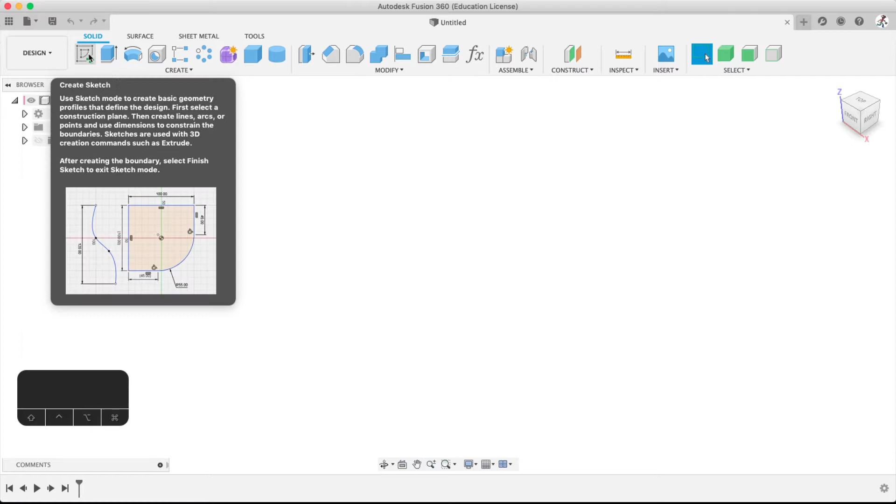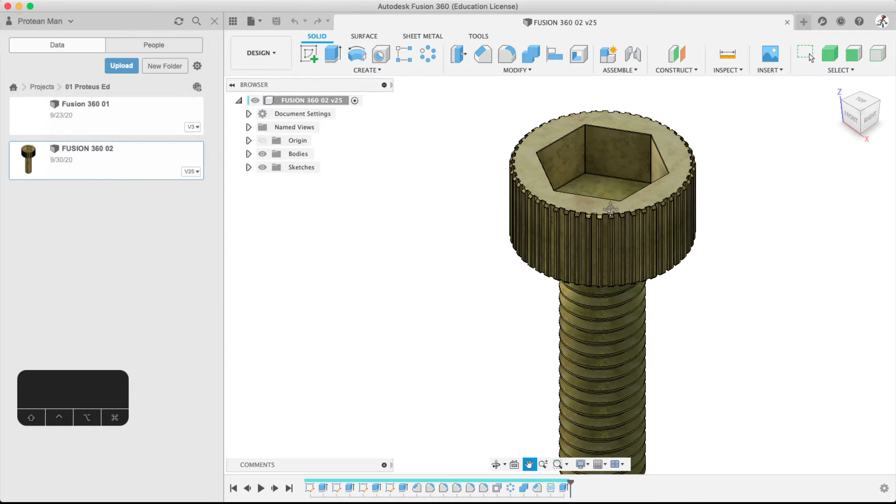Today we're going to look at sketching. We're going to look at some basics in sketching, and we are also going to redesign the beginning of this bolt, just the head part, in the sketching environment, because the head has those little ridges, those grips on it. This is an M3 bolt. So we're going to look at how to design this in a different way, more of an engineering professional CAD design way. And we're going to get right into that right now with a brand new design.

So first thing first is always save. I'm going to Command S and save it as Fusion 04 because it's the fourth video in our series. Now, what did I call it before? Fusion 360, yeah, 02. 03 was rendering, there wasn't a need for a different one for that. Now, let's get right into it. We're going to start with the head of our 3mm bolt.

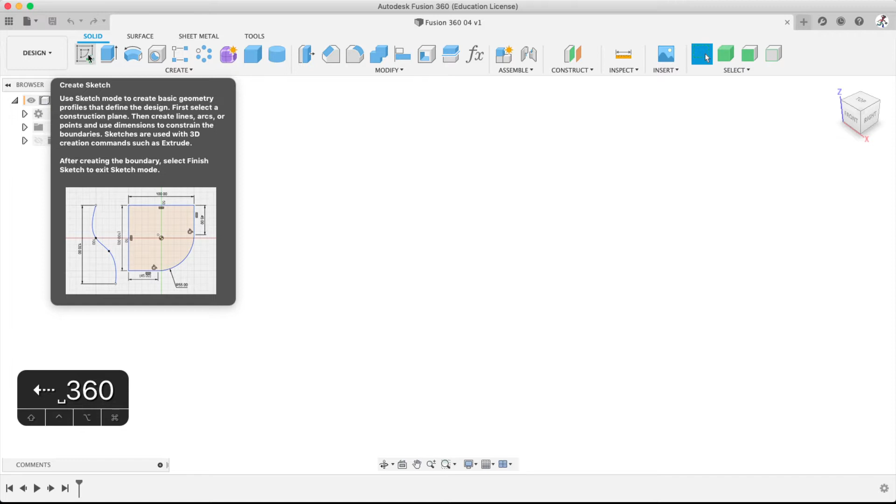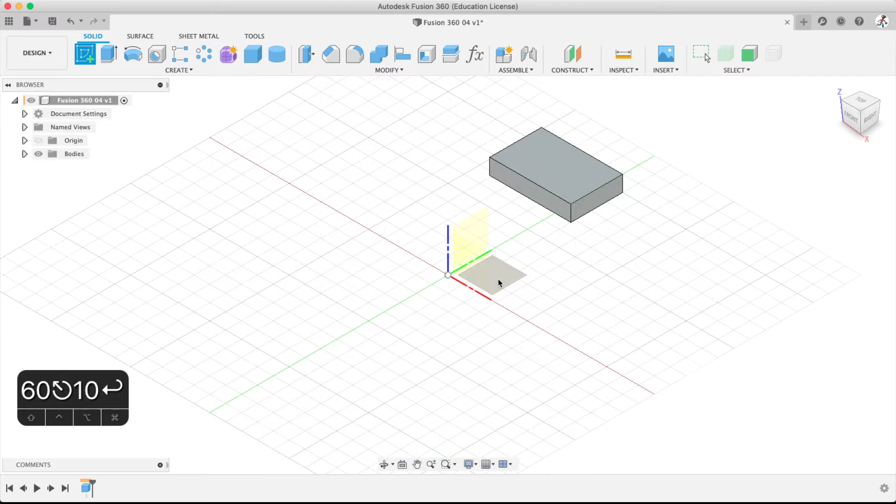Now, when you open the sketch environment, there's a few things that you should be aware of. One, when you click it, the origin will pop up. If you have other objects in the view, let's say I have a cube over here, that will also be there too. You can use any flat surface as the reference for your sketch. What that means is that I can use any of these origins, the X, Y, and Z planes, or I can use a part of this cube. If I want to design on this part of the cube, I can click that and it will go right to that, zoom in, and you can draw on there. That's the basics of the start in sketching.

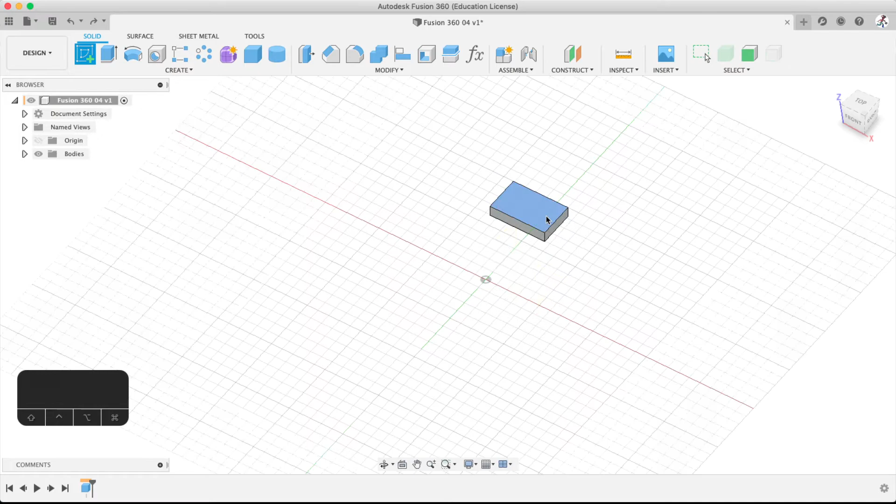It will also snap its view to whatever you select. You can see I did this. If I cancel out, go back to sketch, I click this, it will snap to the view. That's important to realize too. You can turn this off. I turn it off, to be honest, because I personally don't like how it snaps. Sometimes I have very complicated objects and the view gets cluttered when it snaps to a certain position. So I usually set it up so I can see it clearly, and then I sketch where I can currently see. That's just my workflow. You can do whatever you want.

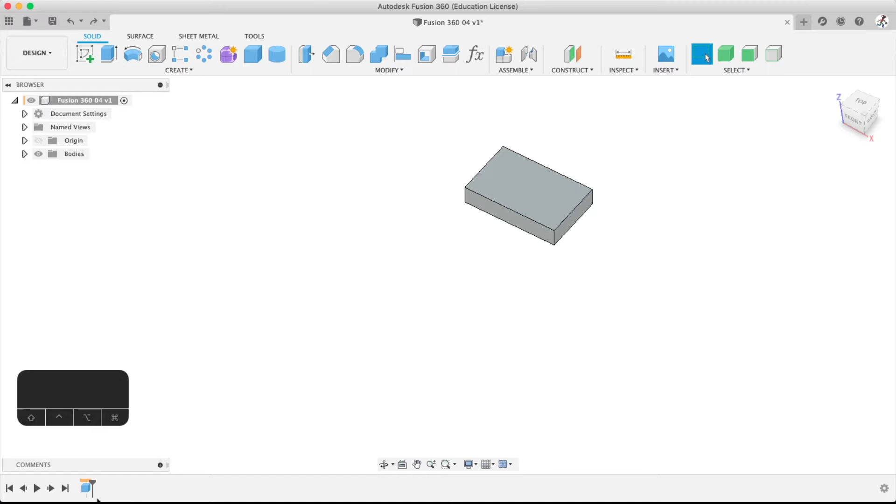But how you change it is up here on the right-hand side under your name or logo, whatever is in your Fusion software. In the preferences, I think it's under the Design tab. There's one of the options, it says Snap View to Sketching. Actually, I'll just go there right now. Preferences, because this is supposed to be for education design. I think it's auto look at sketch. It's right there. So I turn that off myself. I'm going to keep it on for just this video. And then I'm also going to remove this.

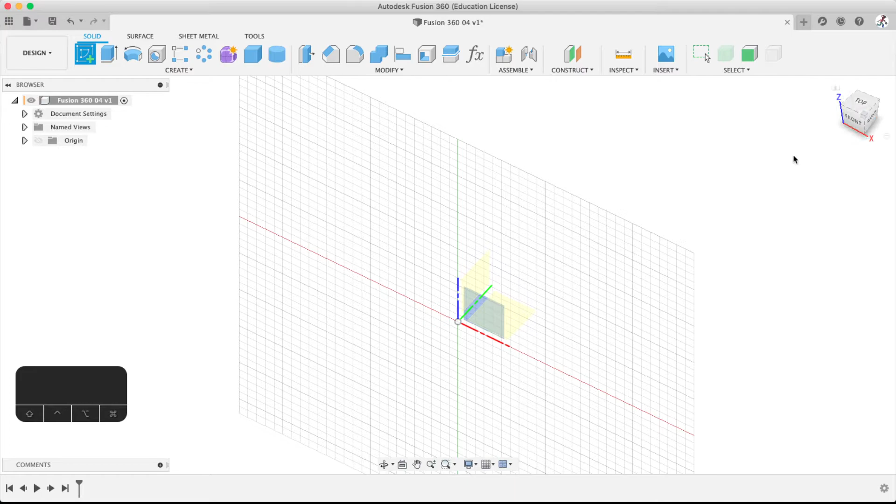This here is what my keyboard is doing. Shift, Command, etc. If you've seen previous videos, you know what I'm talking about. I'm not going to reiterate that again. So here we go. Sketching. I'm going to sketch on the Z plane. There's the top, and just by reference, that will tell me that is the Z plane. If you're brand new to Fusion and you have experience using, let's say, AutoCAD or other engineering or professional architecture drawing software programs, then this will be quite familiar to you, just different looks and different feels, but the tools and the way that it works should be very familiar.

If you are new to Fusion but also have no experience sketching at all, this will be a great way to start, because I'm going to show you some things that you might not realize right away, or little tidbit tricks that will help you avoid some frustrating things that, I promise you, I've gone through when I first learned Fusion that I now know, and it changed everything, because it was very, very hard to deal with certain things that weren't working the way I wanted them to.

Now, first things first, you can make your environment different. This is always a personal preference. Down here below, you have the movement and view options, which is the same as your middle mouse button, right? Moving around. But you also have things like your environment settings and mesh details and other different tabs you can mess around with. The environment settings is quite common for the first little bit of using your sketching.

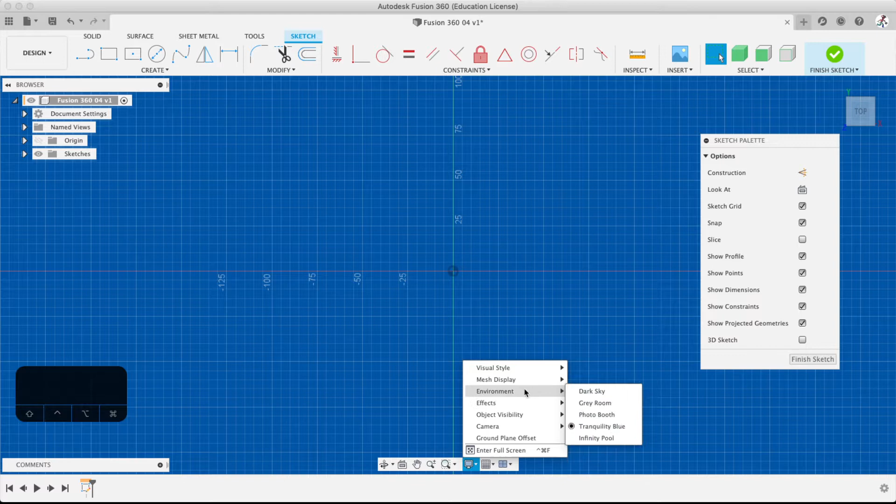Let's say you're an architect or you are an engineer, you might want to go to blue. This is a personal preference thing. The default, I think, is the tranquility blue. You can go photo booth, you can go gray, dark sky, whatever your preference is. I'm going to go back to the default in Fusion just to keep it even for everybody else who just starts out with the program.

Other thing is this grid. If it's not here for some reason, that is over here on the sketch palette. We have the sketch grid. We have snapping, which will snap your objects when you're drawing to the grid. And that's always dependent on if you zoom in or zoom out, because the grid adjusts its size, and it's always relative to where you are zoomed in and how far away you are from the object.

You can actually change that. I think it's down here, something with the mesh display. One of these options should change it so that the grid itself, if you zoom in and zoom out, won't actually change its size. It will keep the exact same distance per grid mark. And you can set that up if you want that. You can do anything you want.

The last thing, profile, etc. We don't need that kind of stuff for a long time. Constraints, if you don't want the constraints, that's here, but they're already up in the toolbar. I'm guessing that's from previous versions of Fusion.

The last thing, which can really mess you up if you have already existing 3D objects like that cube I deleted a minute ago, is this. If this is selected, then the tools will also snap to the 3D objects outside of this sketch plane. So just watch that. I've done that a few times. It's messed me up, and I zoom out and pull out of the sketch environment, and it's just a total disaster, even though it looked fine in the environment. It happens sometimes.

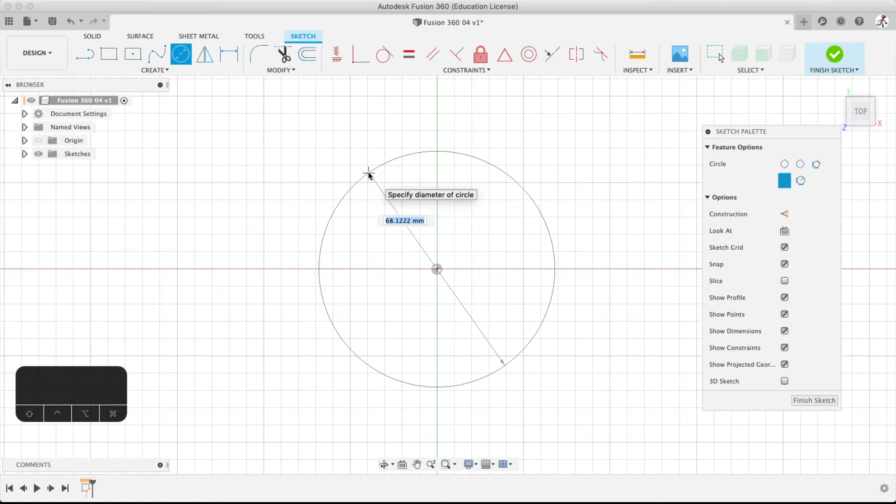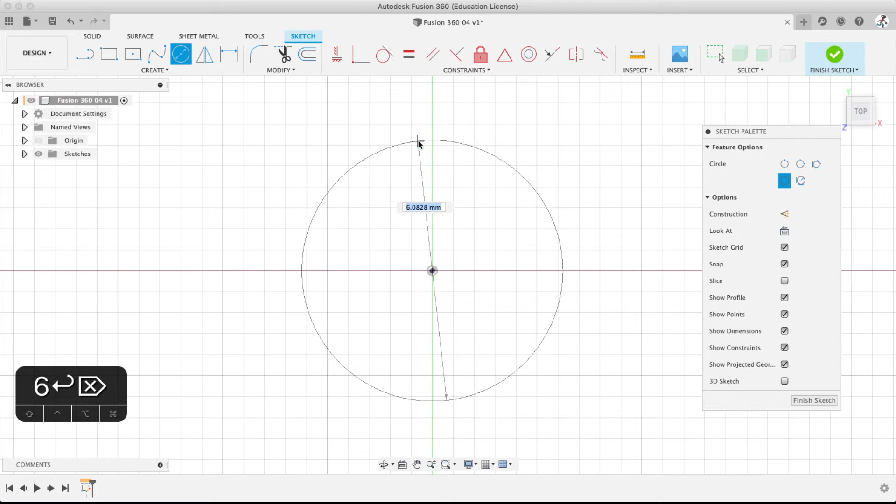Pull it out. And I remember that the head on our bolt is 6 millimeters in diameter. It looks small until you zoom in. The sketch grid has adjusted itself to 6 millimeters. Now you can pull it out and drag it to 6. Let's say I highlight this and delete. You can also click the center and pull it out until it says 6 in that box. And you can use the grid. You can snap to other points, but we're going to go right there.

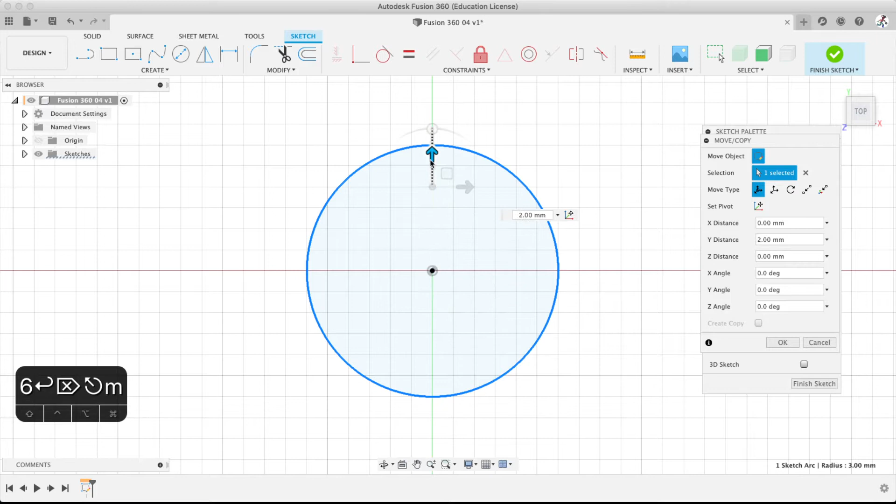Now this is where I get to my first little trick, because this is a confusing part when you do something later, like moving a part of a sketch. If I click this and I push M, I can now move my sketch, but nothing's happening. Even though it's showing me it's moving 1.5, 2, it's not actually moving anywhere. And this is where people get frustrated very, very fast.

The first thing to keep in mind is that Fusion needs a starting reference for everything you do. Whether you create a new object, a new sketch, whether you're in any other environment, whenever you make something new, it needs a reference as a starting point. And here's where Fusion gets a little sticky. The origin point is a static reference. That reference will always be the exact same, because it's very important for the way that the filing system and the constraints work, and everything works around the origin point. The origin point is dead center in 3D space.

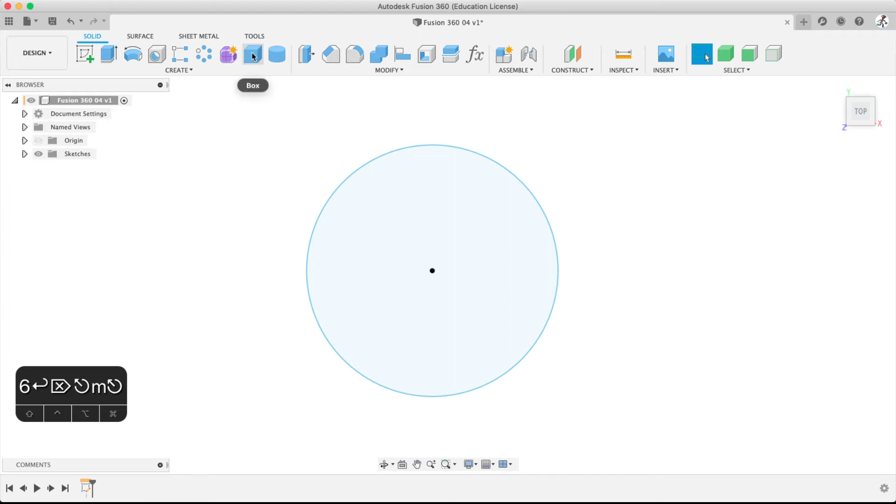If you use the origin point as your reference, then whatever object uses that will be stuck. I mean in the sketch environment. 3D objects, like making a box, if I go back here, will not be stuck. So this is in the sketch environment only. Let me right click and edit sketch again. So let's say this one won't move.

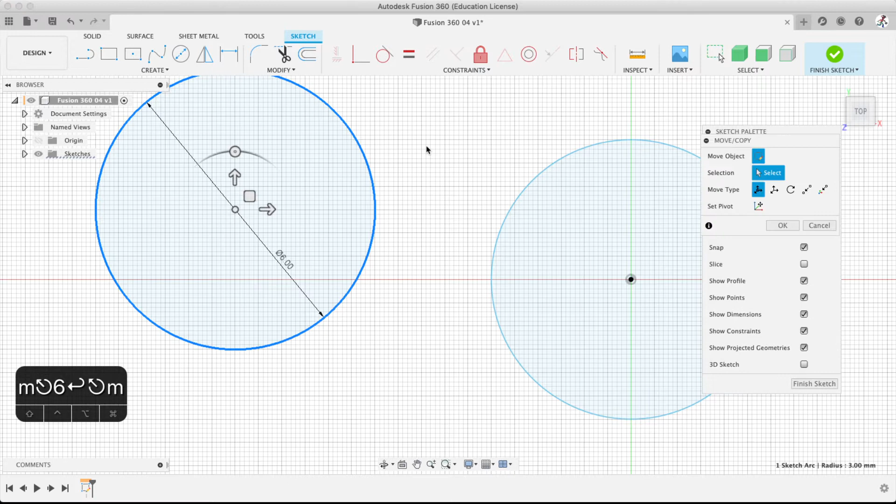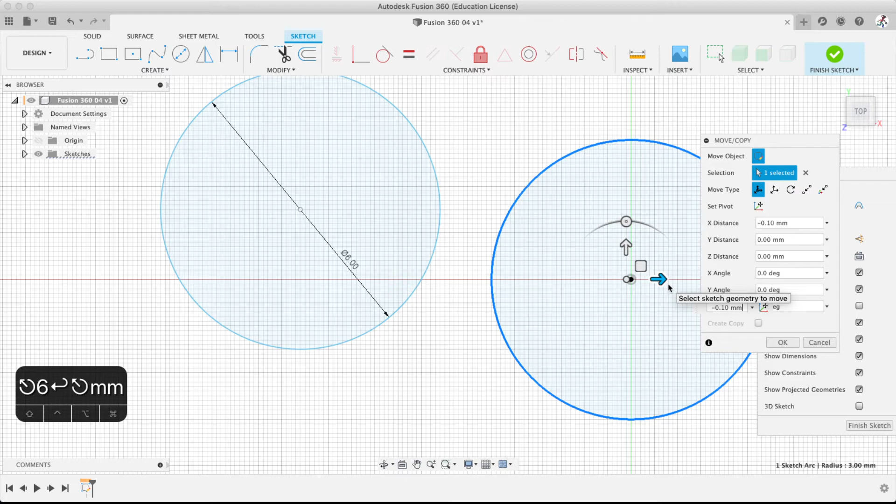If I make the exact same circle over here, 6, hit escape to cancel that tool out, still in the environment. Now if I click it and push M, I can actually move it. This one moves. Okay. Click this and push M. This one does not move. So if that happens to you, the first reason is probably because the reference point you use to create whatever that sketch object is locked in space, locked in the Fusion space.

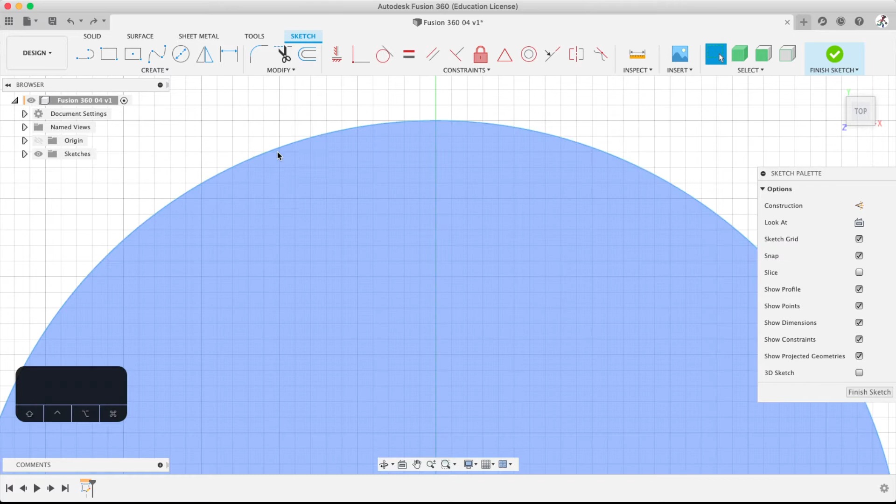That's the reason. The second reason is it might have a constraint, and that's sort of a later video. We don't really need to use these right now. We might use one or two as an example, but this is more of a medium level. Start out with our sketches. So we have 6 millimeters. Now, if you notice on the bolt earlier, those grips come inside the bolt. The outside of the grip, if I measured it around the entire thing, would be 6 millimeters. I don't think I actually made it like that, but we're going to keep that in our mind.

Now I'm going to make a reference line. This is going to help me keep everything even across. So I'm going to start at the origin and pull out until the edge, and you can follow along. I hope you're following along and copying me. That reference line is going to help me snap to the edge of the circle. Let me show you why.

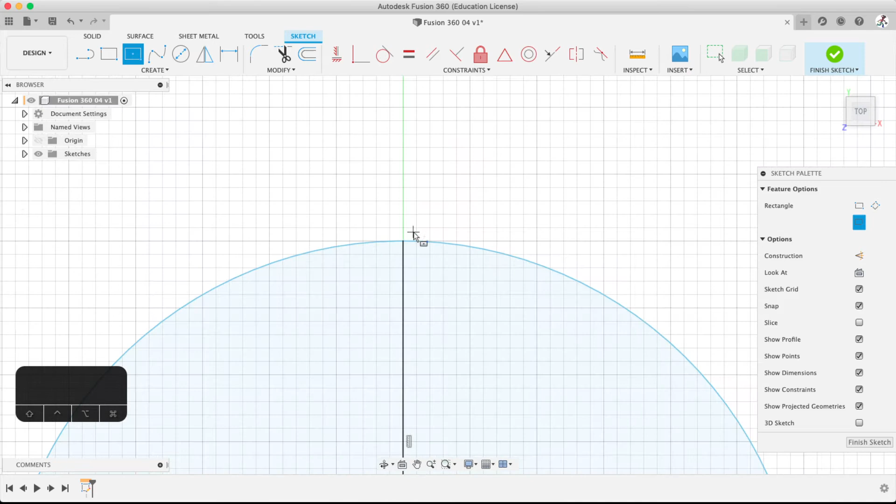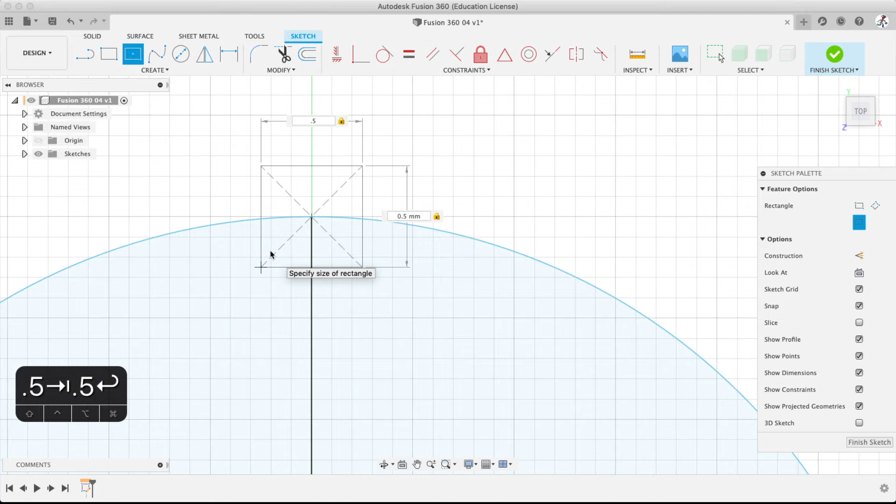If I did this and I went around the circle, I can go anywhere in between the grid points. Even though I add more grid points, I can still slide between. It's not actually snapping onto the grid. So that reference line I used is just to help me snap. And let's say I do 0.5 by 0.5. We can change it later. Like this, right? Now I have that reference point and I can click it and delete it, and now it's gone.

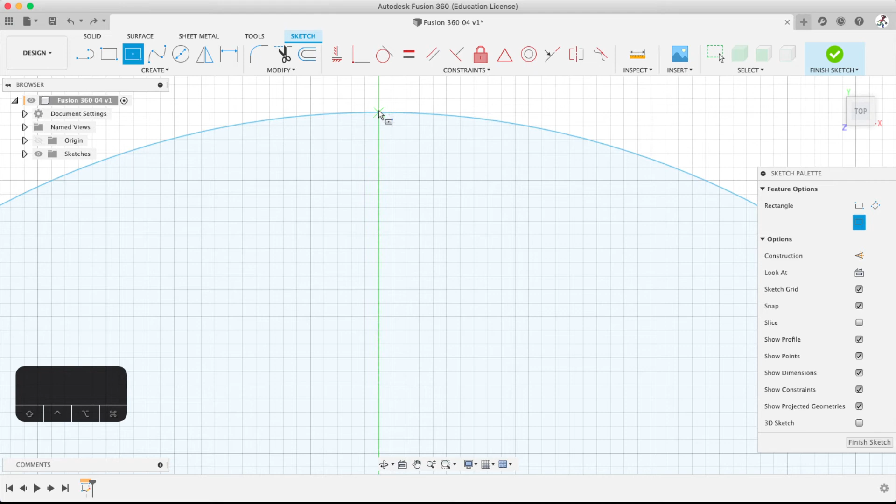The other way to do this, let me back out, is to select your center rectangle, go to the origin and drag up. What it's doing is following that line, and it will snap. And because you did that, it's going to come back and snap to it. If I escape out and go here, it's not actually going to snap there anymore. So you've got to first find the reference, drag out from the reference, and then you can do it again. Go 0.5, 0.5. There we go. So now we have the start of it.

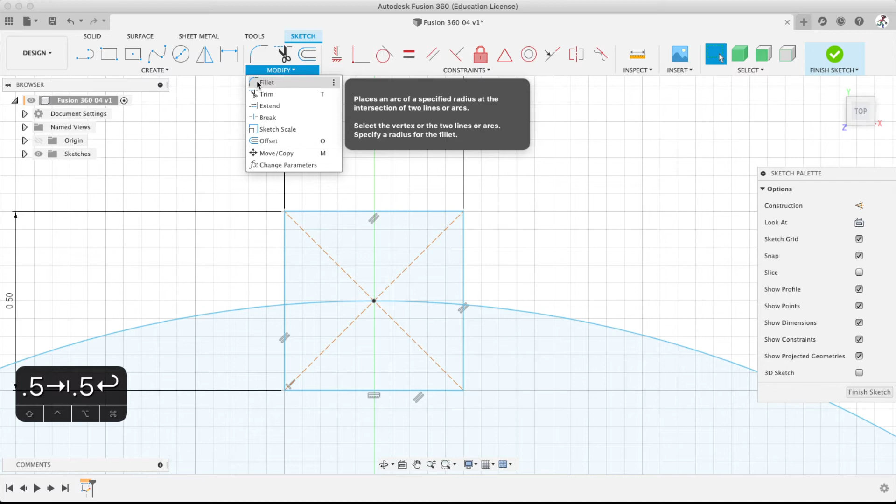The next thing I want to do is probably create a bit of a curve on that edge, because nothing in real life will ever be perfectly 90 degrees like this, especially with a very small object being machined by a CNC or by hand, I guess. And this is where I get to modify it. Fillet is a very common way to create a curve. The other way would be to draw a circle out from that center point. But I'm going to use the fillet command, and all you do with this one is select 2 lines that you want to have an arc between, and then that arc sizing comes up. I think 0.1 is fine to start.

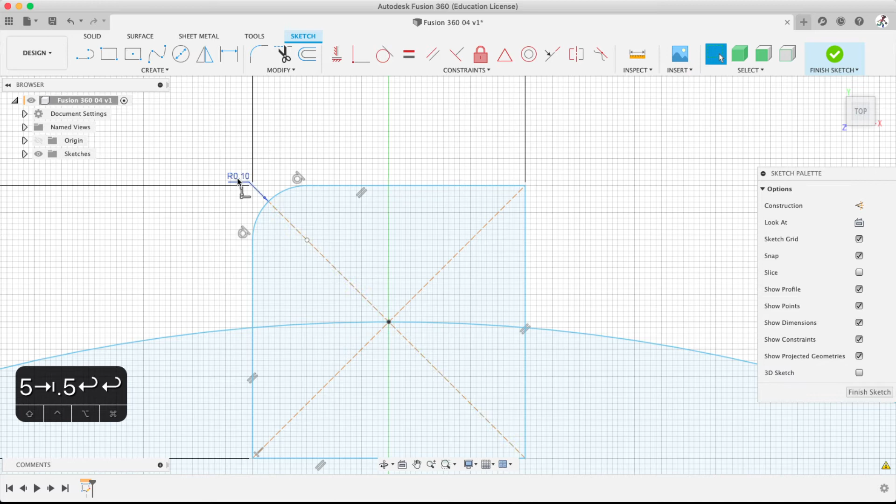0.1 works really well. And you notice these things pop up. These lines here tell me that these two are parallel, these two are parallel down below. It's always a cross for parallel. Perpendicular is a different symbol. And then we have the equal radius or equal tangent, and our R is radius, and 0.1 will be the size. You can change this, double click it, 0.2, and it changes. It adjusts everything around it.

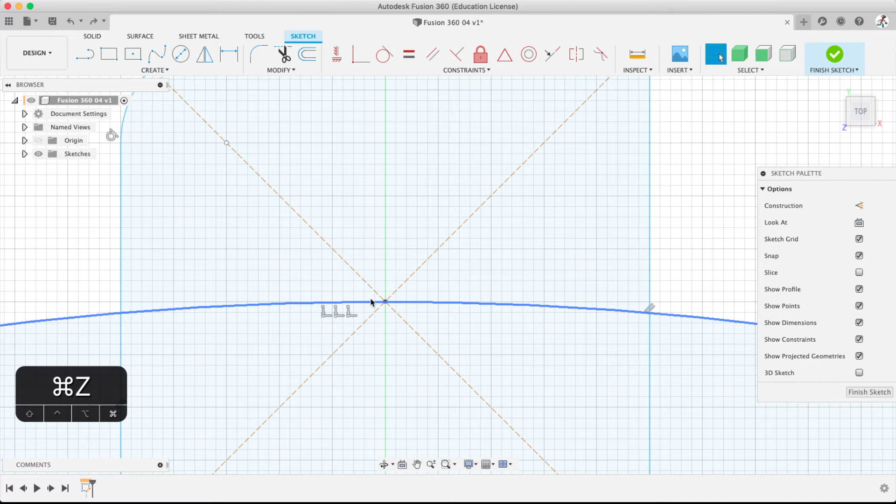And this is where I get into the next annoying thing that Fusion does sometimes. I don't know why it does this, but this is it. You notice how the green line here is the center line. It's off now. If I Command Z, it goes back. Command Shift Z, it goes forward. So this is where I want to do something with the lock command. You can lock this right there, and that's fine. This actually might lock that one too. Escape out. Let's see what happens. Can I fillet this?

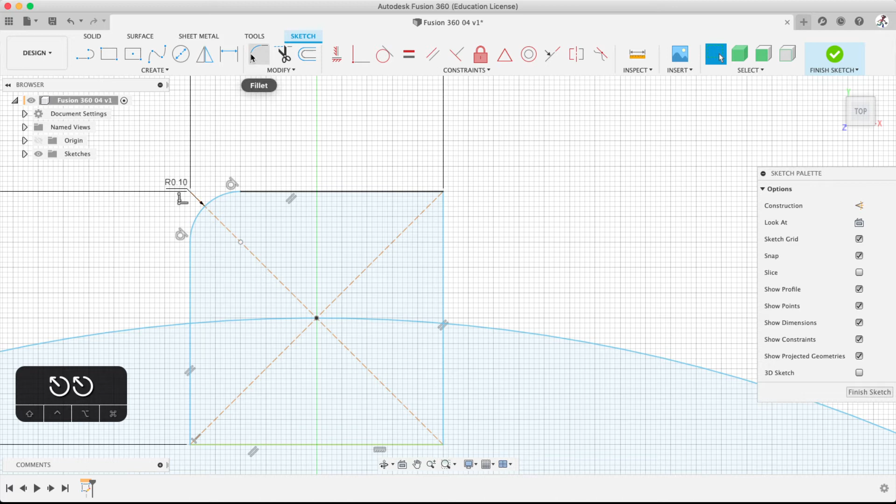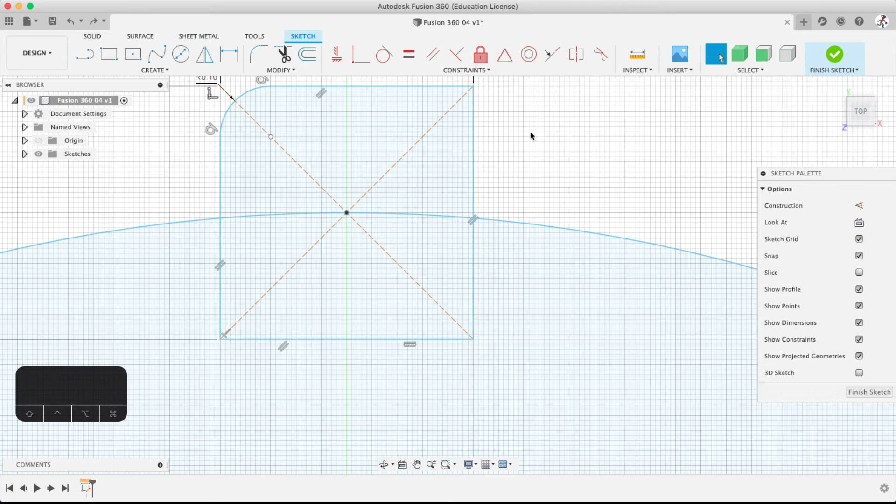0.1. You can still work with it. But because I locked just this one down here, these are all referencing it, because that's parallel, that's parallel. And now, because that's locked, I'm not going to be moving it. Let's say I go back. I like to do this a lot. Apologies if it takes too long, but it's just for education's sake.

If I do this again and I fillet this, it might move. Let me see if it moves. It doesn't move. Just the first one. Maybe someone can tell me why it does this. I've never actually figured out why. I haven't really looked into it either. But that's it. Constraints, I got a warning already. So that's the beginning of it.

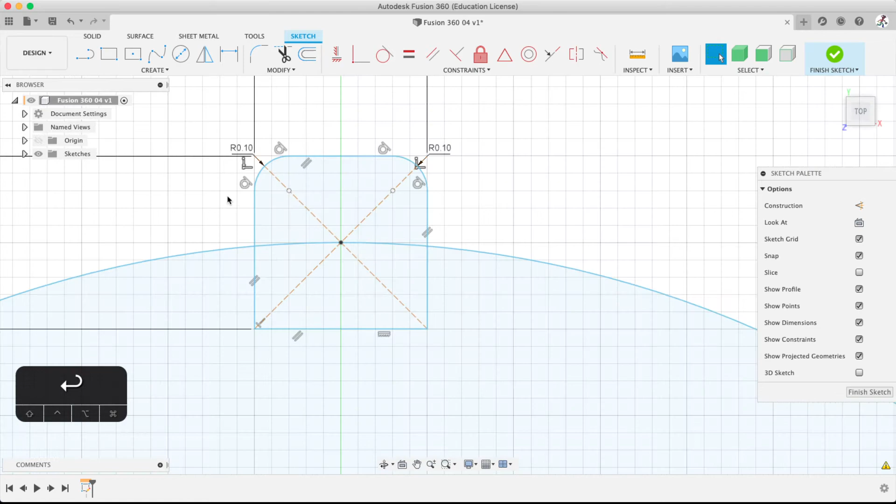Next thing, we are going to make the exact same rounded angle on the outside. The reason why I'm doing this is for CNC sake, because you'll probably use the same bit, the same tool to cut this, which means that angle will be easily cut if it's the same one down here. If it's a sharper angle and that tool is too large to fit in that smaller curve, then you have to get a different tool to do the inside cut. So just for real world usage and making sake, I'm going to keep the exact same curve.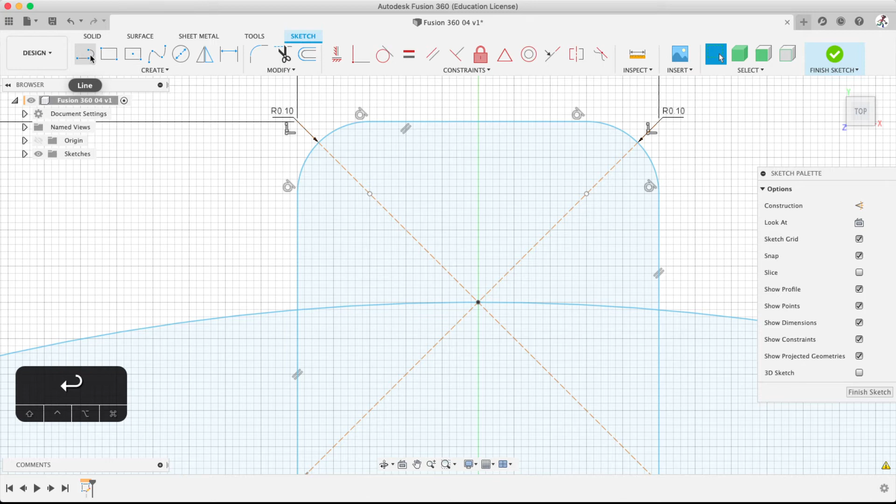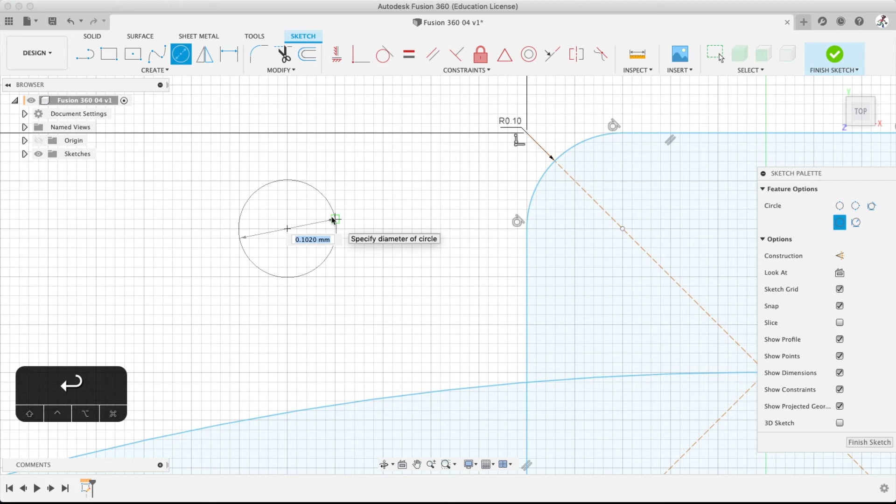Let's do that with a different method, which is the circle method. And here's where we get to have some fun and use the concentric constraint. I know that that's a radius of 0.1. This tells me I need to give it the diameter, center diameter circle. So anywhere you want, I'm going to zoom in, 0.1 becomes 0.2. So 0.2 is the diameter because the radius is 0.1.

Now I'm going to click my lock button, and this is from experience. I'm going to lock this main circle, the main head. I'm going to lock that, push escape to cancel. Hit my, not the concentric, sorry, the tangent constraint. If there's a circle and a line, you're basically taking whatever point of that circle is, and you are sliding it as close as you can up until a separate line.

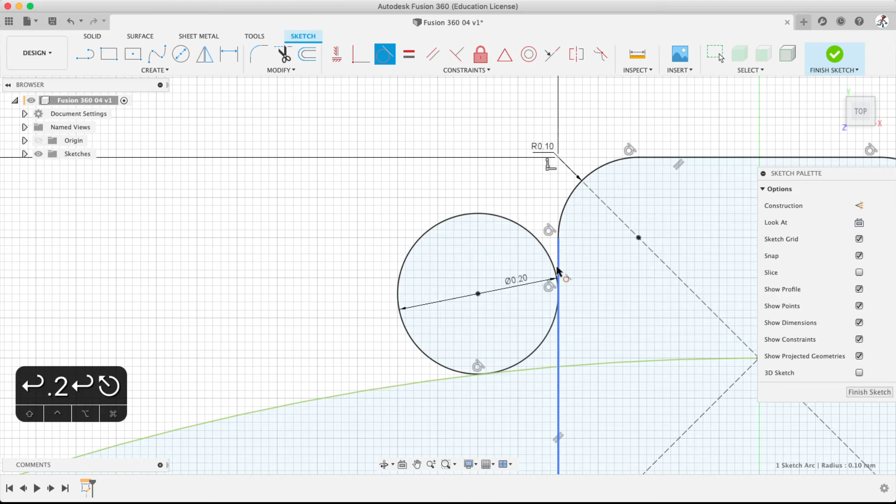I'm going to click my circle, the one I want to move, and I'm going to click my main head, and it just slid right down. It goes to the closest point. The next thing, same thing, tangent, click here, and click my cut. Now we have the start of our curve. 0.1 radius, 0.1 radius. Exact same because it's the diameter of 0.2.

Next, we're going to use our favorite trim tool. Push T for the shortcut if you want. There's not many in here. It's just the second one. This one has a few different options. Now this tool is very handy in the way that it uses the current references that are already existing for each line. If you scroll over a couple of these lines, some parts go red, some parts go blue. I'm sure you already figured out that the red means get rid of and the blue means keep.

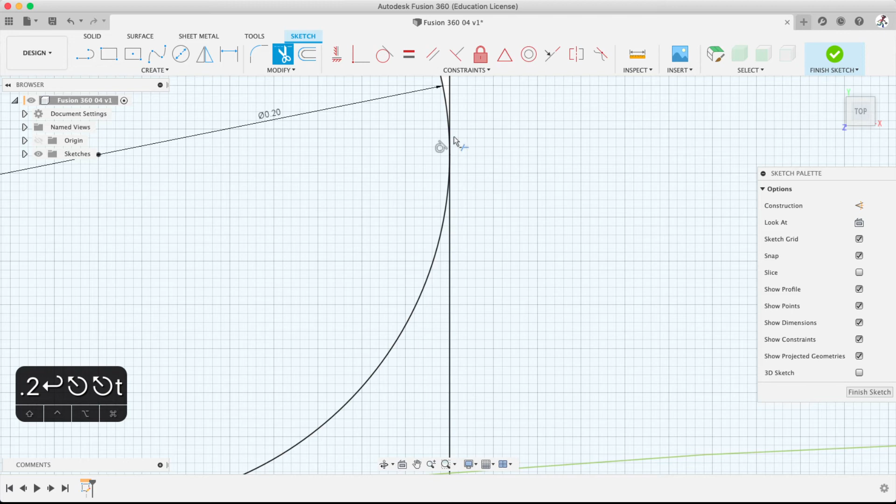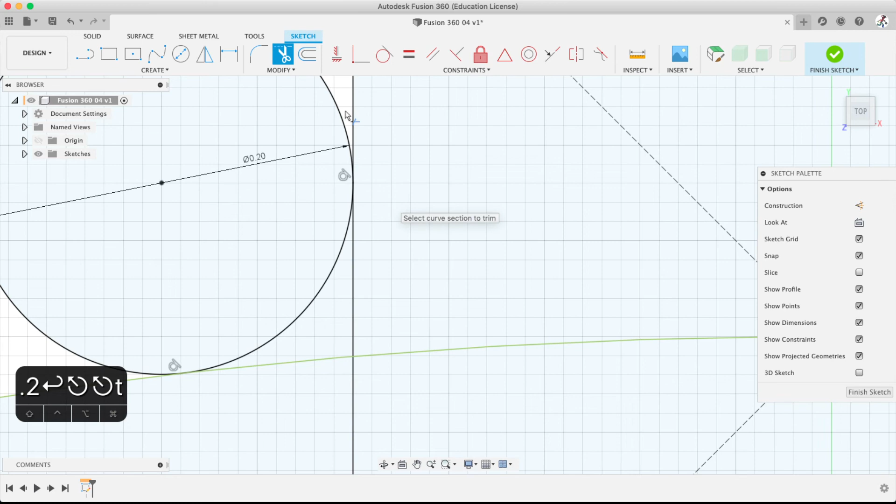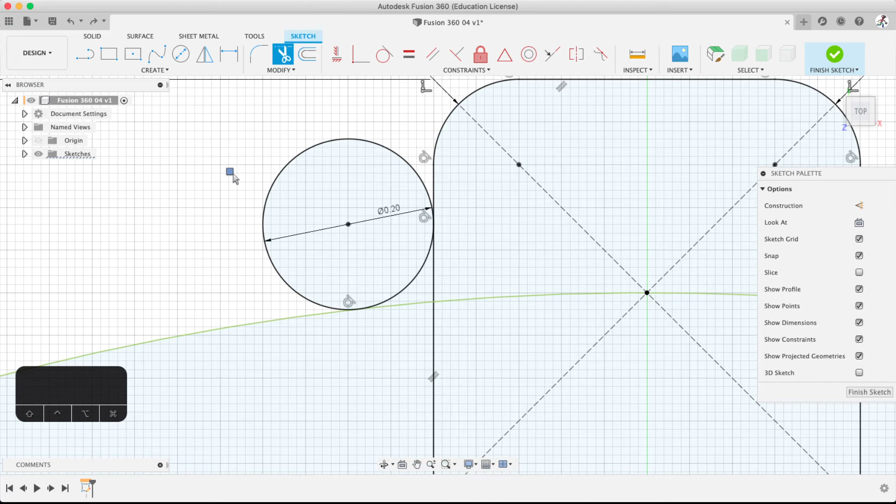Now, all I want to do is get rid of the outside of the circle. I can click like that, and now I have that inside curve. The same curve as this because it's the same measurements. The other way, just to go back, is to drag. If you drag, it turns to the square, which is one of our selection options, and all you do is drag over top of what you want to remove. I'm going to bring that back. So we have half of it.

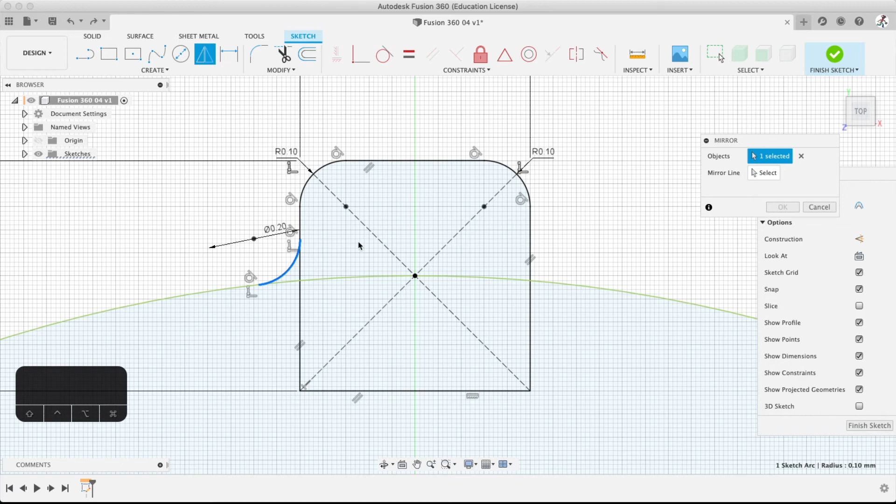The other half, we are going to need a reference line for. This is going to be for the mirroring tool. I'm trying to use as many different tools as I can, just with this very small example. If I click this, I want to copy this and make it exactly the same over here without having to redraw and do all those different steps. Mirror, I don't have an actual mirror reference. I can actually use the origin. If I zoom out, you can use the origin line, or you can't. I guess that only works in 3D space.

So I'm going to create my own reference line. I know that this is the center because it shows me right there with the dot. I'm going to draw up, and you can just find that, and 90 degrees is perfect. I am set. I'm lagging for some reason. I don't know why.

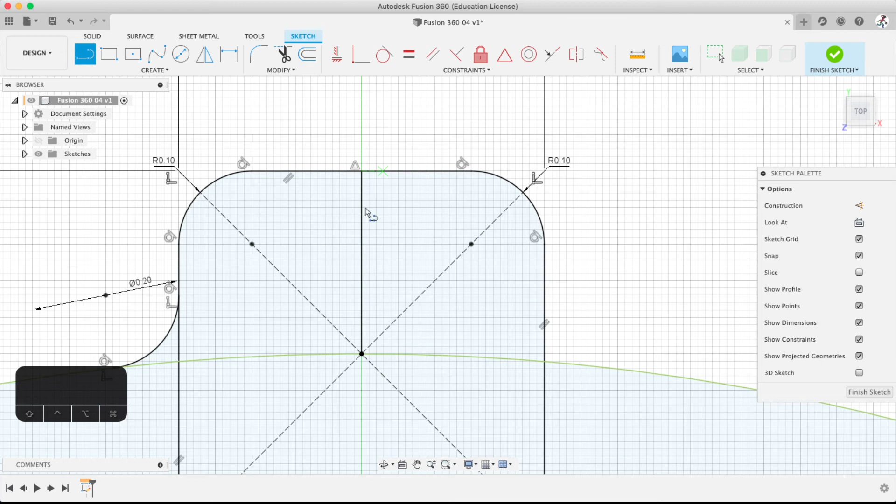Now I have my center reference. Click the object you want to mirror. Come over, use the mirror line, and click. And it's there. Finish it off. Good. Get rid of our reference since I don't need it anymore. So now I have this.

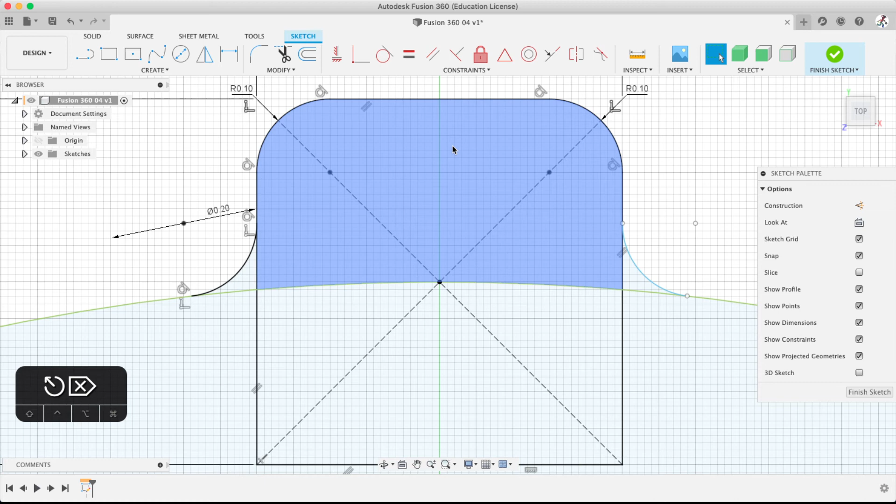Next thing is to clear up a couple things down here. You don't have to, but I'm going to anyways. I'm going to clear up this, this, this, this, and this, just to remove the stuff I don't need.

The next thing, I might want to remove this, and this. Just the same rules, right? It uses whatever the connecting reference is as a cut point. That was a better explanation.

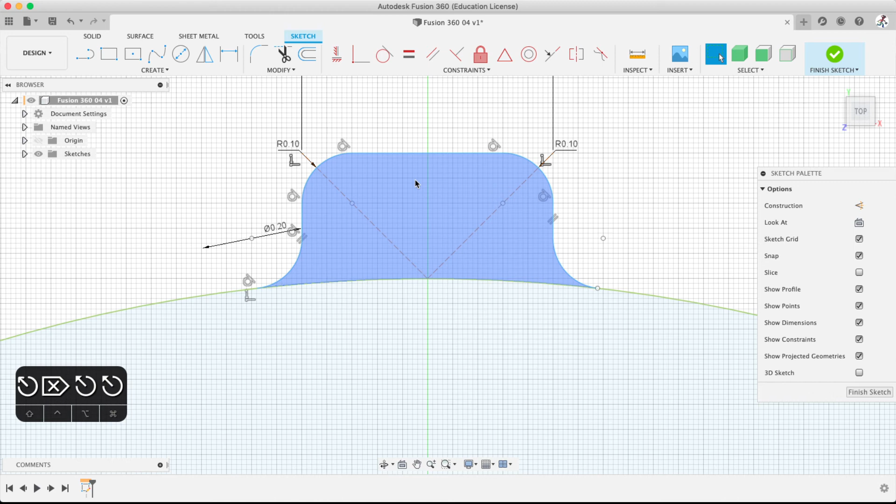So now I have the basic outline of my head. Now this might not be perfect because I didn't do the math on how many exact cuts I need around this circle. This is 6 millimeters. I don't know how many it's going to be exactly, but if you were, you'd actually change the width of this part.

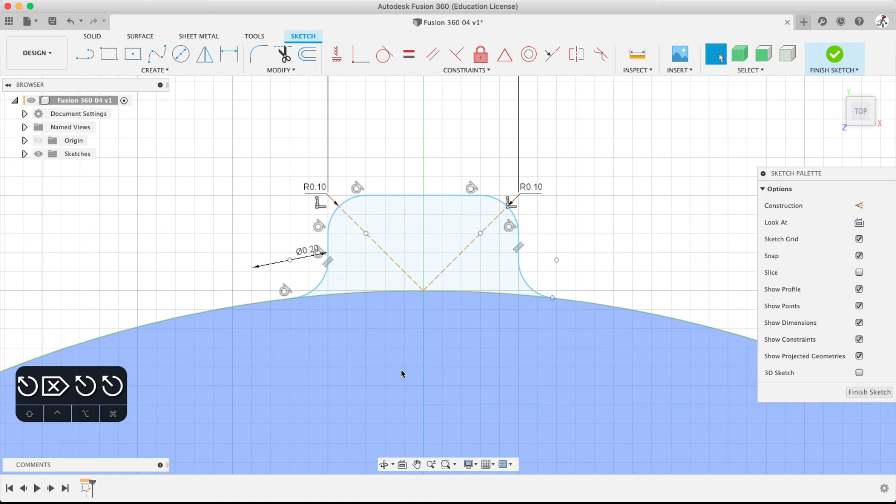I actually should have went the opposite direction on the inside, but that's okay. So now it'll be 7 millimeters. How big is this? It'll be 6.5 millimeters, that's fine. This is just an example, this is not going to be realistic. So this head's 6.5 millimeters.

Next we're going to use one of my favorite tools, the pattern tool. There's a few different patterns. There's one more pattern, which is the line pattern in the 3D space, not the sketch environment.

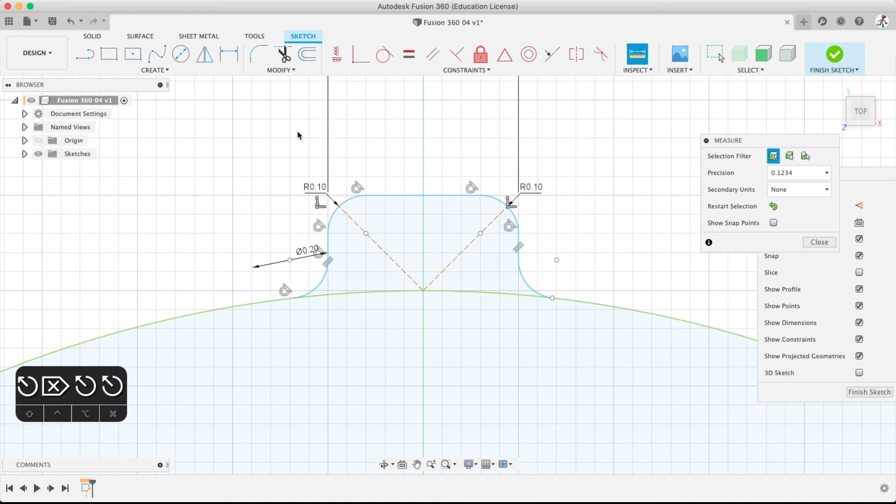What I'm going to do is highlight this because I don't want to select each line individually. I'm going to click my pattern button so it defaults to whatever you selected. The other way is to select everything, object by object, but it takes forever. You can also highlight, but then it gets a bit confusing. Hold shift, there we go. 24, I don't want all those, I just want this.

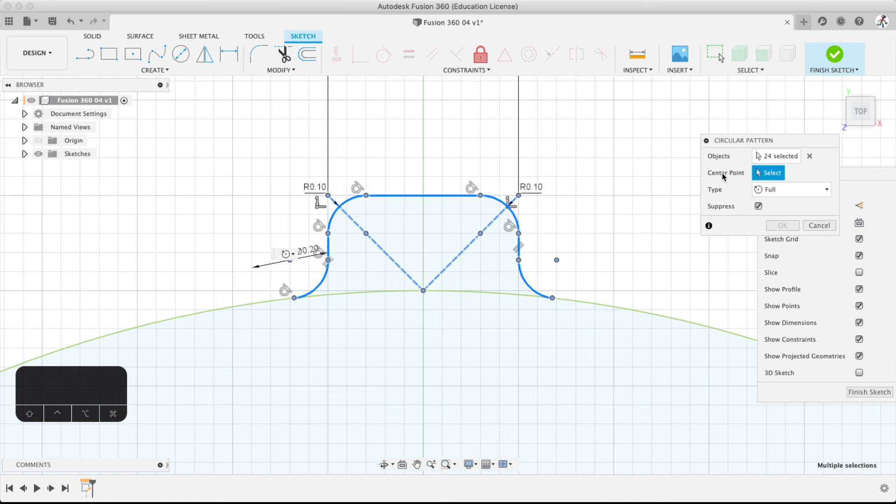Okay, center point, or center circle, basically. You can use this, but I'm going to use the actual head itself. And the default is always 3 for these pattern tools.

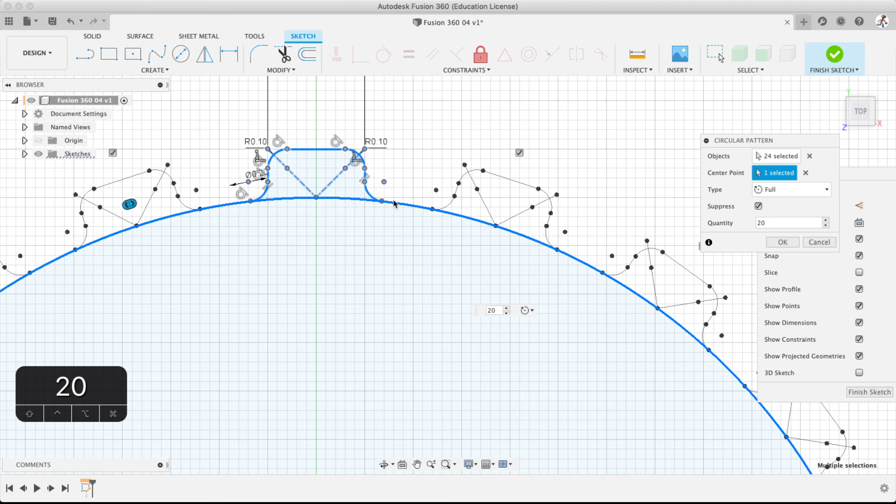Let's try 20. We zoom in. You know what, I think that was a good number right off the bat. I don't know what the size of this is, it doesn't look like it's exact, but it's pretty close. 20, good enough.

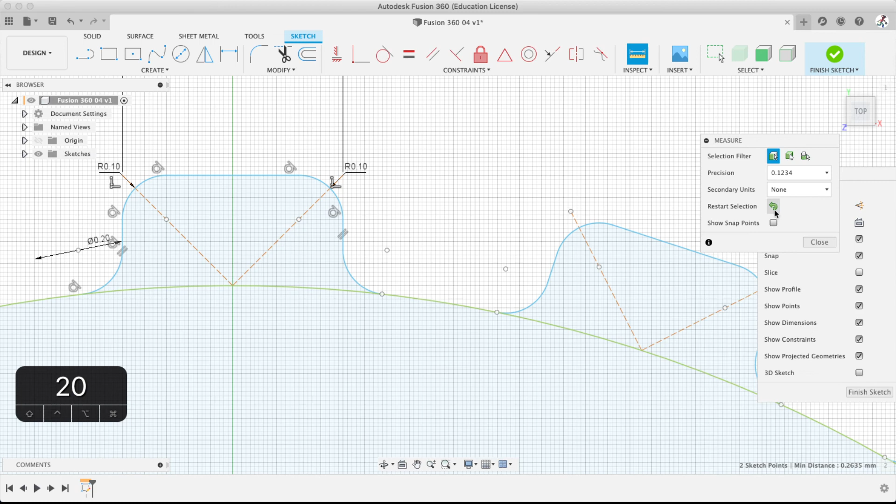Let me just check, just for my sanity's sake. 0.3 length, I'm using the measurement tool. Reset. From here, 0.2635, so it's close. You'd have to adjust these by a very, very small amount in their width to make it even. So it's kind of like a gear, but that's a different math problem for another day.

If you want me to show you how to make gears, the rules for making gears, I can show you. There's actually a plug-in for Fusion that does it for you.

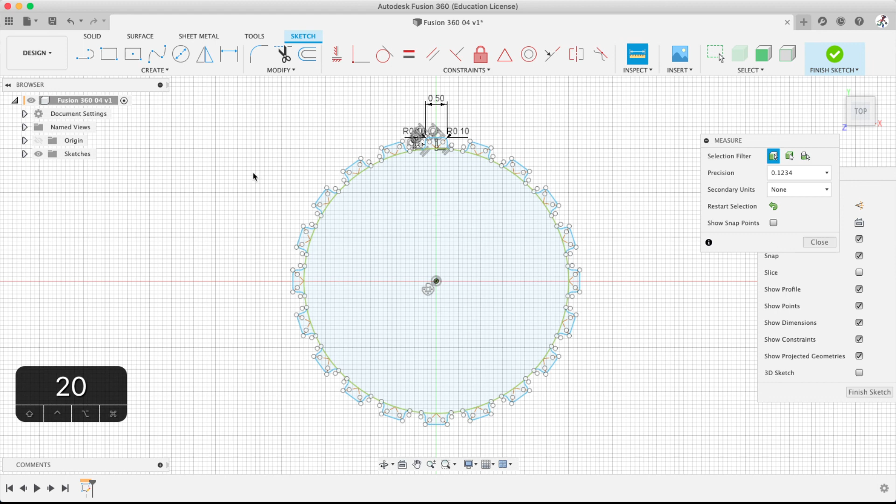Now we have our bolt. This is the head, this is just the beginning. We have all our curves involved.

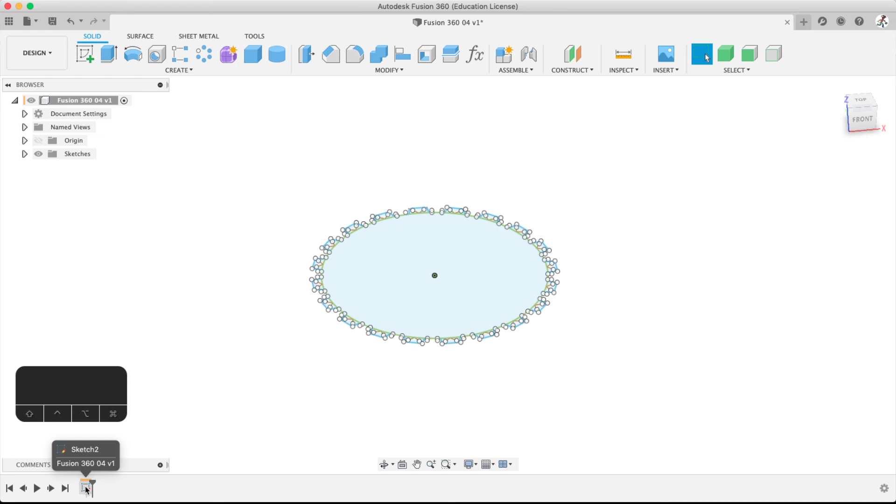The last step is to finish your sketch once you're finished with what you want, and extrude it to make it 3D. Now, if I just move the camera, you can see it's just a 2D object. If you want to change something, you can always just right-click on the history down here and edit your sketch. It will go back to that environment.

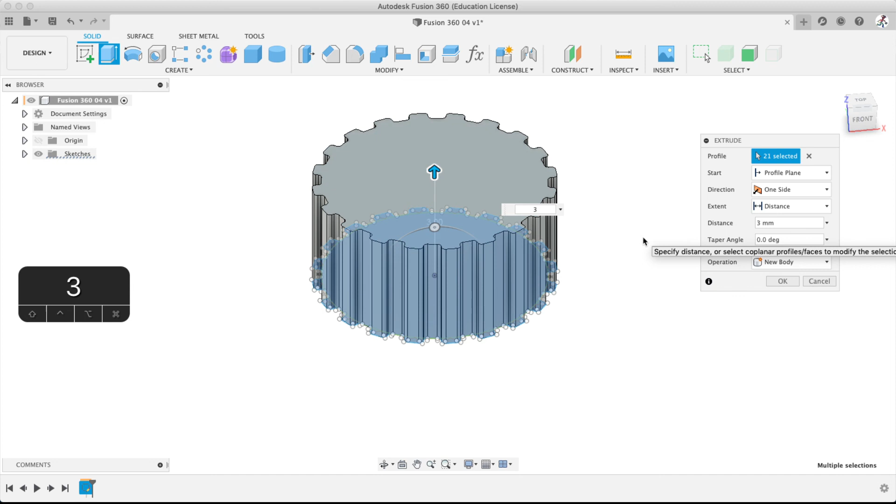Or let's say I extrude this out like this. I'm going to actually highlight everything, hold shift, and then click that so it's everything. I think it was 3 millimeters tall, that's fine. 3 millimeters, new body, I'm done. The sketch will disappear once you make it 3D, but it's not gone forever, it's just hidden. The sketch is still there.

And here's where you get to the last thing in our sketching environment. The last tip and trick is nothing is set in stone, you can always change it. You can right click here or right click on the history of that sketch and edit that sketch. It will go back in time.

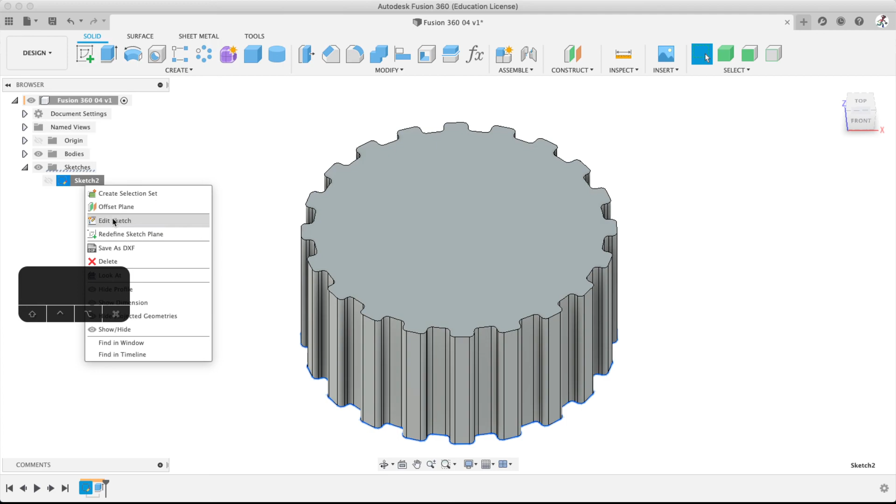But let's say I want to change this to 0.12. It probably won't actually work because it's referencing. Will it work? It's thinking for days. Great, did I just find a bug in Fusion? No, I didn't, those things are a bit wonky now. That's fine, let's see what happens.

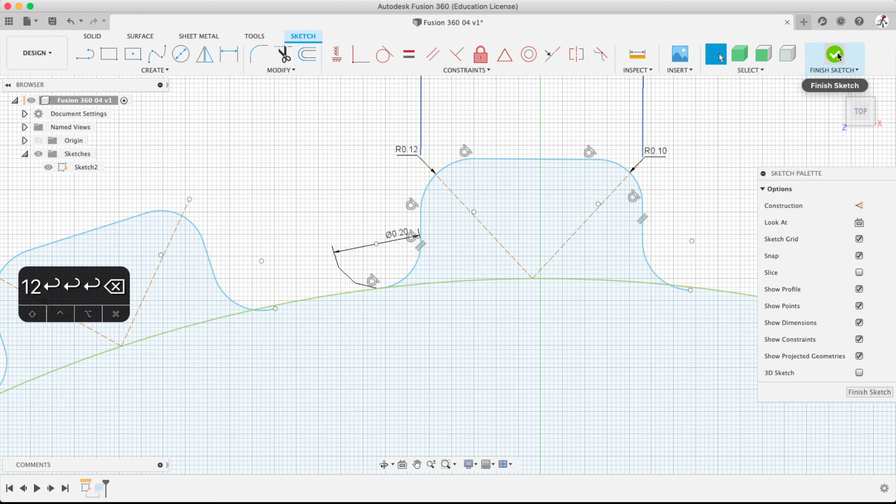Now that 0.12 becomes only one side of each ridge, but it adjusts here too. So this is the basis of the sketch environment. I hope this helps you.